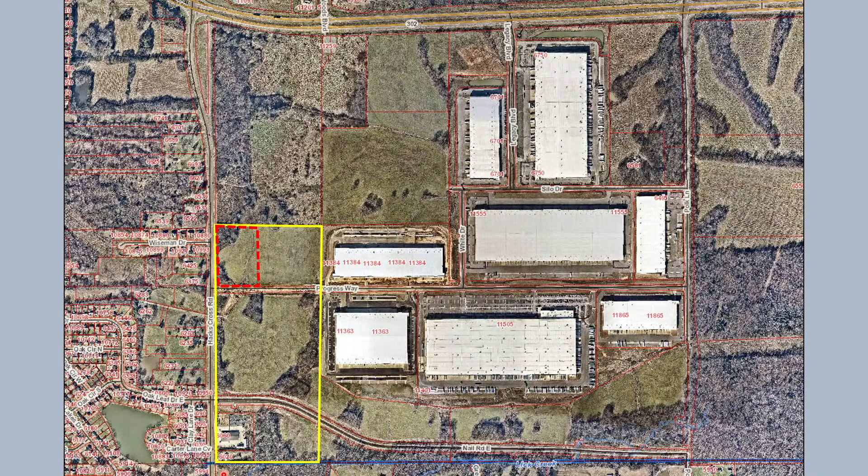So the preliminary development plan that was approved in 2009 had a vision of these having large shops and offices everywhere, which is just not realistic. Over time, a lot has changed in this area that has really made that plan unrealistic.

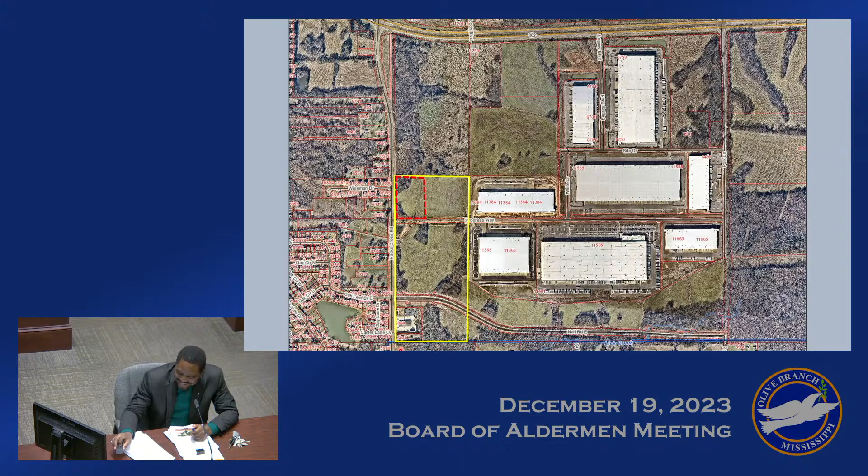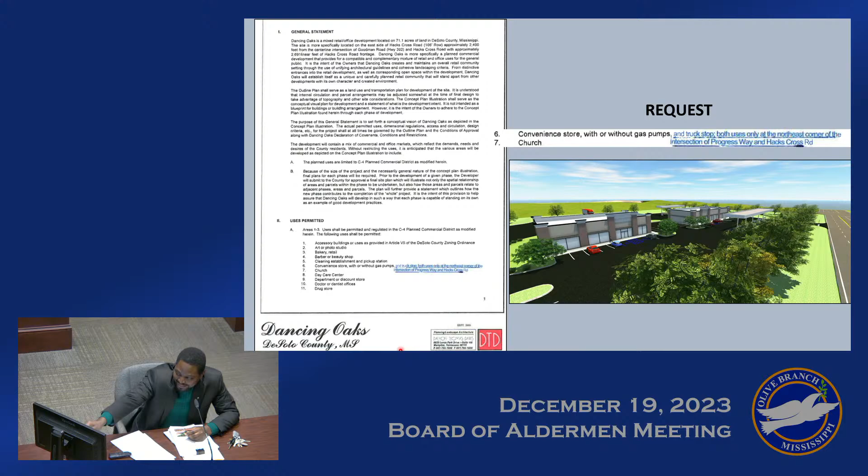The application, therefore, seeks to make that area designated in red into a C-store, really already the permitted use, with truck parking at the back, as shown on the site plan you have at the bottom of your screen to the right. So that basically would be the layout.

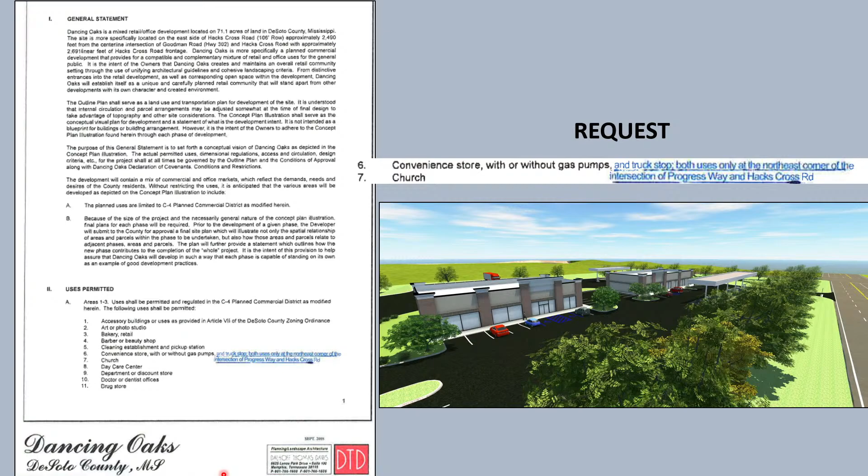When this was first considered by the Planning Commission at their meeting in November, it only had one building. You did not have this second building in front of where you have the truck parking at the back. But the neighborhood was concerned about the possibility of sitting on Wiseman Drive and being able to see those trucks - they didn't want that. So the applicant decided to add another building there that would serve as a buffer between Hacks Cross Road and the truck parking area at the back. That is why you had that second building added.

As I did indicate, in 2008-2009, when this project text was approved, this was essentially an agricultural area to the east, as you see on the map before you. So in 2009, that is the area map - it was essentially green, all agriculture. Since then, there has been significant industrial development to the east that has changed the character of this area and will make this amendment provide an opportunity for truck parking and necessities - a public need, one would say.

There are currently, including the square footage of industrial warehouses that have been approved in this legacy park, over 6 million square feet of industrial warehouses. That is a lot of trucking activity that takes place there. And so being able to provide commercial services that can service those trucks is a public need.

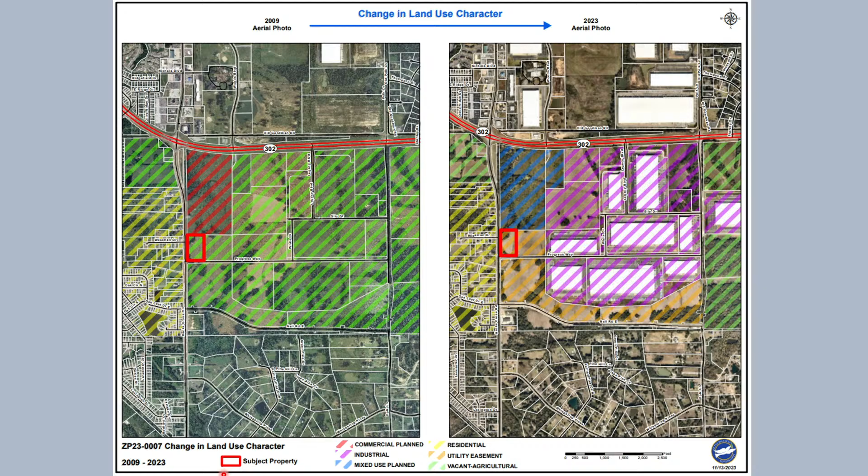Just as we have over here with the QuikTrip. QuikTrip is really helping to take away truck traffic all across the city. We're able to have folks just go in there, fuel, park, and then leave the city.

So this kind of analysis - the zoning ordinance has a number of provisions on how we review any changes that are requested in the C4 zoning district. Consistency with the minimum development standards of the C4 - all the conditions or the development standards for the Dancing Oaks PD will remain in place. None of them is requested to be changed. So in terms of buffer, parking requirement, everything that you had required in the project text for the C4, that is being maintained in this project text, in this amendment. The second is for the board to find that the request has been made by the property owner.

Yes, it's been made by the property owner. The third has to do with traffic conditions.

This is actually estimated that it will reduce traffic, especially truck traffic driving across the city. From the industrial park right down to Flying J is about 2.23 miles, that's where trucks currently go to now. Those that go to QuikTrip is 5.09 miles, and the very next truck stop area where you have any kind of truck parking is in Blue Bird, which is 7.39 miles. So if you aggregate that, that's over 15 miles of truck traffic on public streets that will be reduced by having this at this particular corner.

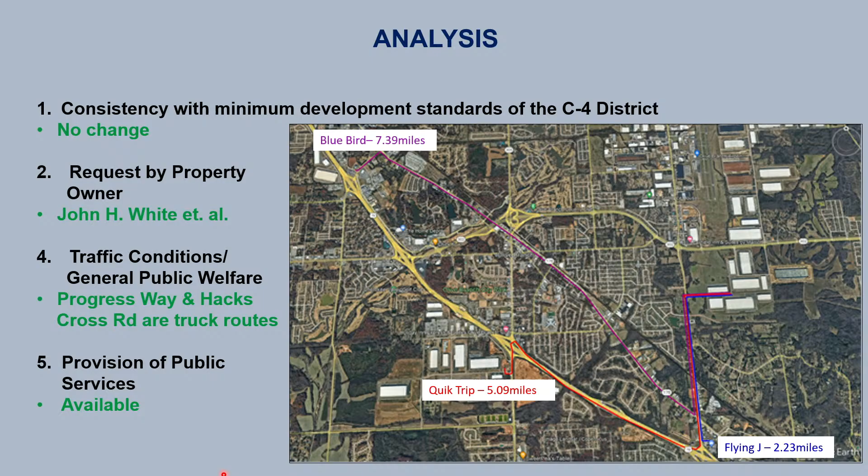When the board last year amended the zoning ordinance, you had two requirements for any area that has to do with a truck stop: one, it has to be within half a mile of a truck route, and the property must be a minimum of 2 acres in size. So this is 7 acres, and it is on Hacks Cross Road and Progress Way. Those are all truck routes, well within that half mile requirement. So it meets those two specifications.

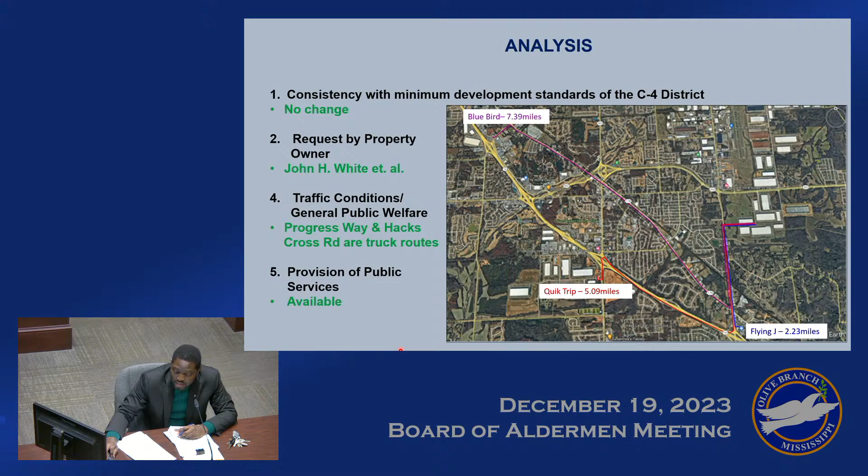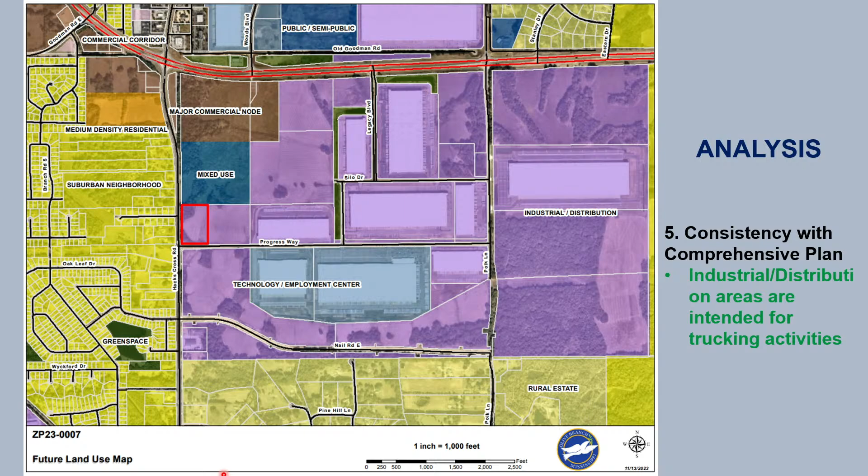Public utilities are available around this property, and it will be the responsibility of the developer to extend them to serve any development on the site. The future land use map designates the site for industrial distribution. Those are areas that generally lend themselves to trucking activities. As such, the requested amendment aligns with the future land use map.

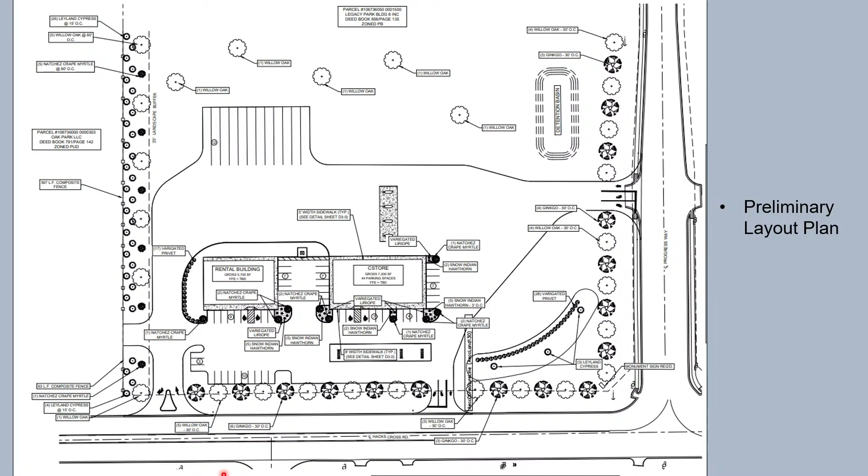This is the preliminary development plan. It incorporates all the features that are currently required in the Dancing Oaks PD. All of them are included in this development site plan.

The Planning Commission at its meeting on December 12th reviewed this and unanimously recommended approval subject to finding that the character of the area has changed. The comprehensive plan designates the property for industrial distribution activities, which include trucking support services, and the proposed development has the potential to reduce truck traffic congestion on public streets. All other criteria having been met, the Planning Commission recommended approval subject to conditions 1 to 5. That concludes staff's presentation. Thank you.

Thank you, Assam. Does the board have any questions of Assam regarding the staff report? Mr. Wallace? The structure that's below, if you look at the bottom of the drawing, the structure here, is this going to be a part of it, or is it going to be taken down, or do you know what the proposal is? There seems to be a structure at the bottom.

No, sir, I think that is an area map that was included in the project text when the project text was adopted back in 2008. So it doesn't exist now? So it doesn't exist today. I think that is directly below John Deere. Okay, that's directly south of John Deere. It doesn't exist today. This will not extend down to that area.

And this development's already approved. It's basically adding a building and allowing trucking, correct? Really, fundamentally, that's what it is. And those approvals, the majority of those came from the county back in 2007 or 8, is that correct? 2008, October 10, 2008.

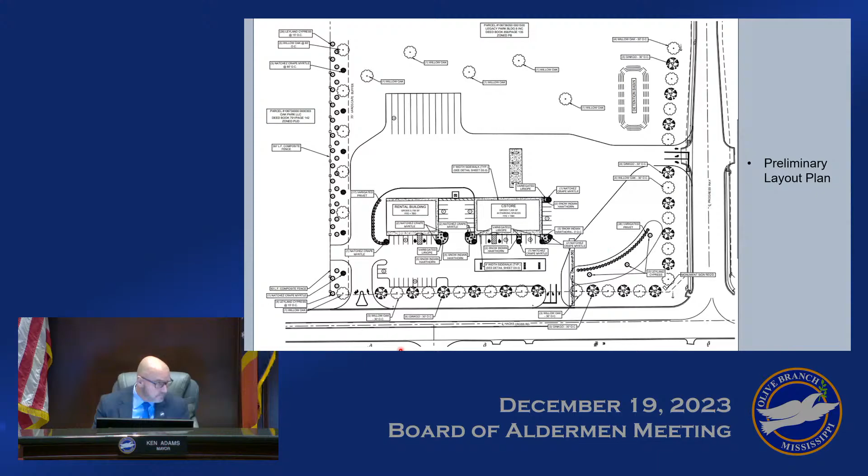One other question: if there's 12 trucks there and somebody pulls up and needs to stop, can they pull out on Progress Way and park on the side of the road? No, that would be prohibited. You cannot park on a public street, you cannot park on Progress Way. And I think that was part of the reason the Planning Commission also asked the applicant to increase the stacking lane behind the building from where you have the filling station down to Progress Way. Initially, it was 106 feet; they increased it to about 204 feet, to give more room for trucks to stand on the property instead of being on Progress Way.

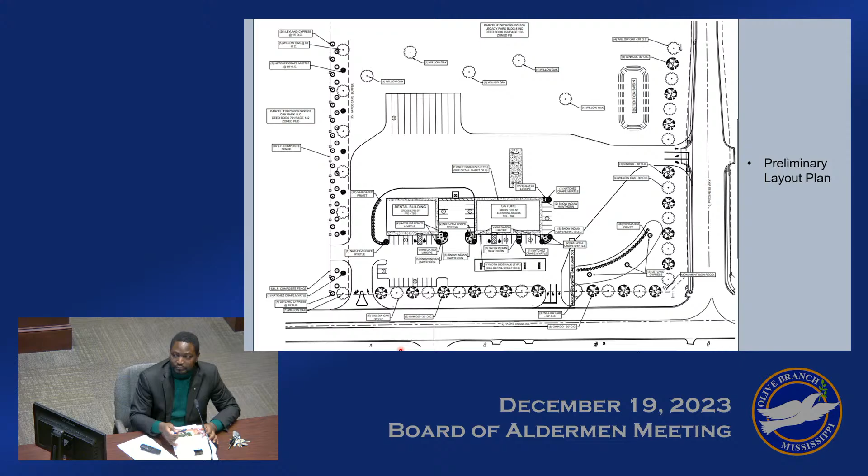So I have a question for clarification. If I heard you right, in 2008 when the county approved this, it allows for multiple C-stores by right there. However, we approved something within this past year limiting locations like this to no more than 2, and they have to be on a hard corner or a major intersection of a highway or major road. Is that correct? Yes, sir, with a caveat.

For this particular piece of property, Progress Way and Hacks is a hard corner. There's a traffic light at that intersection. So that'll be the differentiator, no more than 2 per hard corner and at a signalized intersection. There has to be a traffic signal there. Yes, sir. But for C4 property, that's a caveat, they are not required to be at a hard corner. That is left to the discretion of the board.

Don't they bring their property rights with them when they came into the city? Even though we changed the ordinance, their rules didn't change as far as the property rights they already had obtained, correct? Yes, sir, because it's C4, or another planned district, but in this case, C4.

One side note, Mr. Dickerson, I know you asked about the truck parking, so the board will know, because of the off-ramps on 78 we're getting tractor trailers there all night long. The police chief Cox and I have made a formal request of MDOT to make those no-parking ramps, and they're working to do that. I spoke with them last week, and we're going to try to get the trucks off those ramps. I know they've got to go somewhere, but too much parking on the street is too dangerous, people getting on and off the ramps. Sorry to defer there.

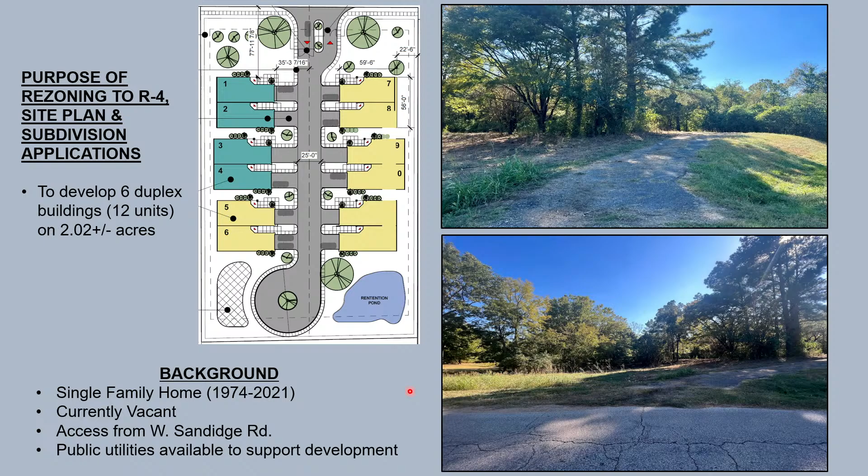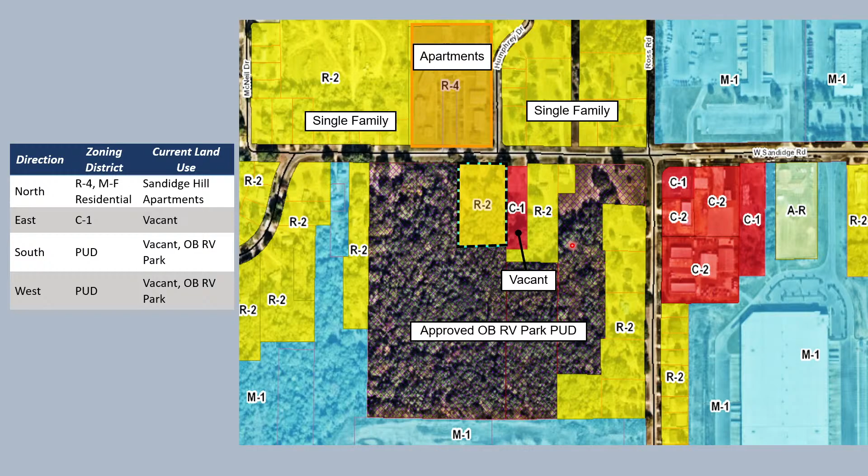As far as surrounding zoning, here's our subject property shown as R2. To the north we have R4 property, multifamily residential, the site of the Sandidge Hill Apartments. To the east of the subject property, there's a vacant piece of land designated C1, neighborhood commercial. To the south and west of the property is the project you approved in a PD about this time last year for the Olive Branch RV Park, which wraps around the property boundary on both sides. This shows a depiction of the subject property in the red square, and the master plan you approved last year for the Olive Branch RV Park that surrounds the property.

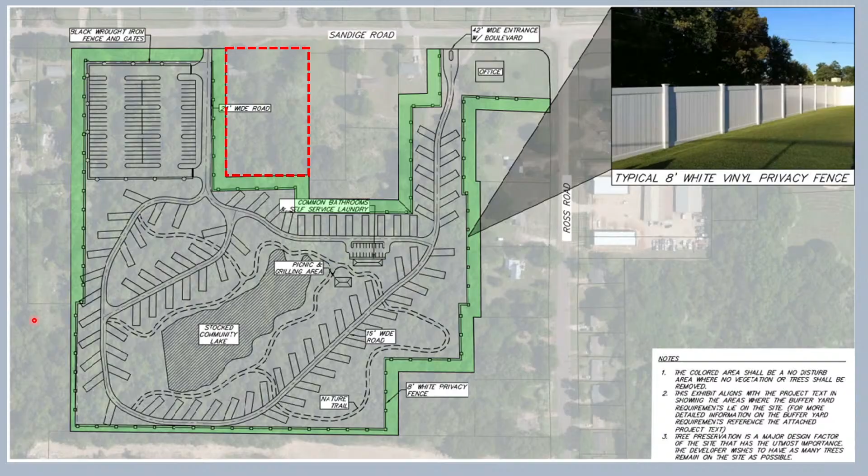As far as our analysis goes, there's no claim that the original zoning classification for the property was a mistake. As for the character of the neighborhood, the applicant has made a point that the neighborhood has changed significantly since the single-family home was built there in the 1970s. You can see what we have going on around the property—I mentioned the RV park immediately near the property, and this property owner also owns a piece of R2 located just to the east of the subject property.

Mentioned earlier the apartments in the R4 district, and we have quite a bit of single family around the property along Ross Road to the north and south, and more single family as you move farther to the west. The biggest change over the years is the amount of development in the M1 light industrial zoning district.

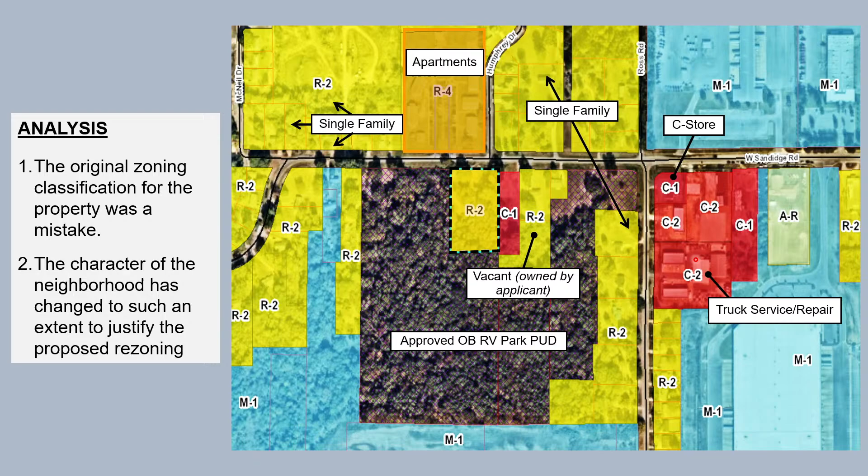More recently, we've had a C-store, a building reconverted into a convenience store at the southeast corner of West Sandidge and Ross, and some improvements for a truck service repair business located a little bit to the south of that.

Our comprehensive plan, adopted last year about this time, talked about the need to diversify the housing stock of the city. Citing a policy, new residential growth will be primarily comprised of single-family homes, but the future land use plan recognizes the need for diversification of the city's housing stock.

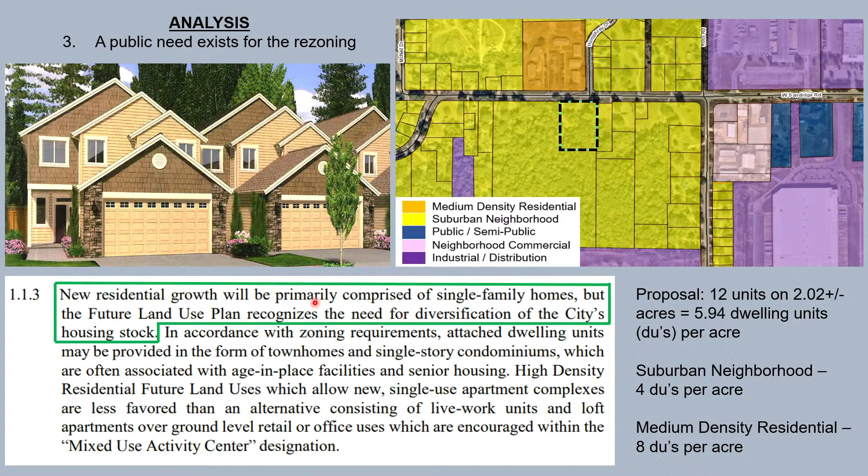We have a proposal for basically 12 dwelling units on a little over 2 acres, which comes out to just under 6 units per acre. So we're not significantly higher than the suburban neighborhood designation, and we're lower than medium density residential. We're meeting this policy of trying to diversify our single-family housing stock, and the duplex product is one we don't have much of in our city.

If you take a look out from our subject property, this shows you the future land use map. Here's our subject property, and one of the items I was discussing with Alderwoman Hamilton earlier today is what's going to happen as you go farther west on Ross Road.

The future land use map shows that area designated for single-family or suburban residential located to the west, and at the corner we have the Thunderbrook planned unit development, which is designated for a mixed-use center. So this is the plan.

Our subject property would be off of this picture, and as you come down Sandidge Road, it currently ends right here, but you can see the plan approved a couple years ago for the Thunderbrook property. That's all a single-family designated area.

You'd have Sandidge Road cutting through this way and back down here, and we've approved this area for mixed-use buildings, which would be lower-level retail and possibly apartment units on top. That was a picture shown in the Thunderbrook plan.

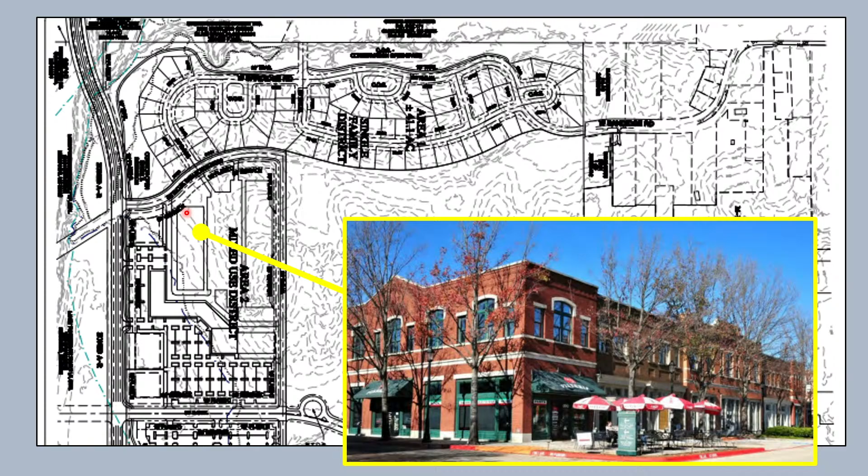So you can see how, as we go into the future, the area of the subject property is transitioning into maybe a higher density residential category. And as we get all the way to the corner of Craft Road, we could have a mixed-use development with somewhat higher densities as well.

As far as the site plan, it's depicted here, and this deals with several factors: do we have adequate open space and drainage facilities, how does our proposed land use fit in, do we have adequate community facilities, and are we complying with the comprehensive plan, which I just discussed?

You can see we have a proposed detention pond here, and substantial open space along Sandidge Road. This proposal is for a private road, to be gated out here — you can see some gates off of Sandidge Road.

You can see the units, and all of them would have two-car garages, with some area for stacking of vehicles in the driveways as well. Again, this would all be behind a gate, so this would be a private driveway and not a public road.

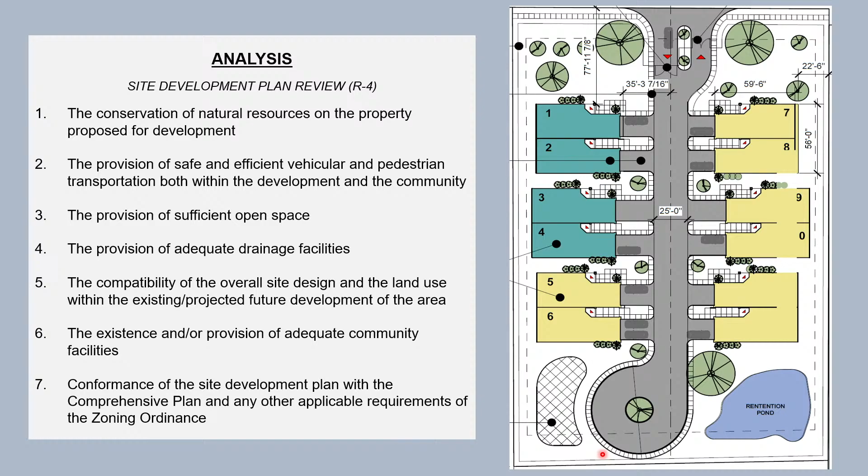The Planning Commission reviewed this item at their December 12th meeting and, by a unanimous 5-0 margin, passed a motion approving the requested rezoning and the associated site development plan, subject to 6 conditions. Number 3 deals with a 6-foot high composite fence required around the perimeter of the site.

This is just a preliminary plan that you can see depicted, so they would have to follow through with staff and submit full site, civil, and landscape plans, et cetera, for staff review and approval.

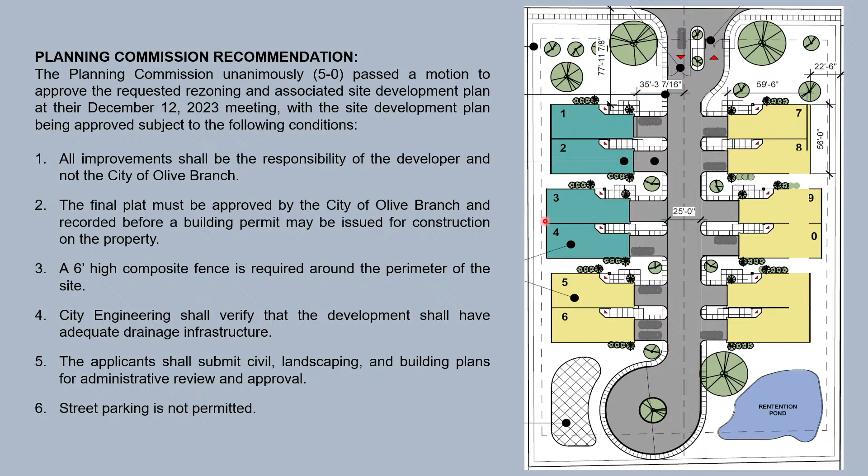Thank you, Mr. Gambone. Any questions of Mr. Gambone regarding the staff report? I do have some questions. I'll start with Mr. Gambone.

Okay, these will be rentals, correct? Well, we have a later agenda item that proposes them all on a single lot, so unless the developer is planning to do a condominium-style development, in all likelihood, they would be rentals.

Do we know what sizes these would be? I believe Ms. Song had talked to the applicant, Ms. Bogan. I believe she's out there, and she may want to answer that question for you.

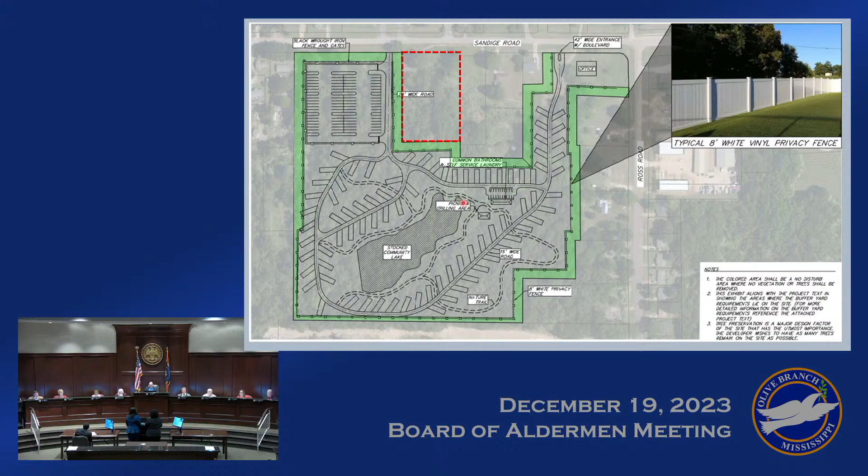If it's okay, we'd like to ask our project consultant, who also did our design on the fencing, to come up. You mind coming up, Mr. Joseph Eccles?

Will y'all own all the houses, or are you going to personally own all the houses, or sell them? Well, right now we have that as an option to sell. So you'll have a homeowners association? Yeah, it would be a separate homeowners association if we decide to sell them.

Come forward, sir, name and address, and you can address the board. Hello, my name is Joseph Eccles, and I'll be working on the architectural and development management of this project. I'm happy to be a part of this project with them. I'm really happy to see that it's been approved once, and I'm hoping we get approved again tonight. I can answer any questions if anyone wants to ask.

I think there are two points: Ms. Hamilton brought up one with the composite fence, and Mr. Gambone, would it be more appropriate that if this is approved, they work with staff on how to tie that fencing in with the RV park? Yes, sir. And the other thing that I think would help the development, I like the concept, but I'd like to see maybe a minimum of 50% brick or stone.

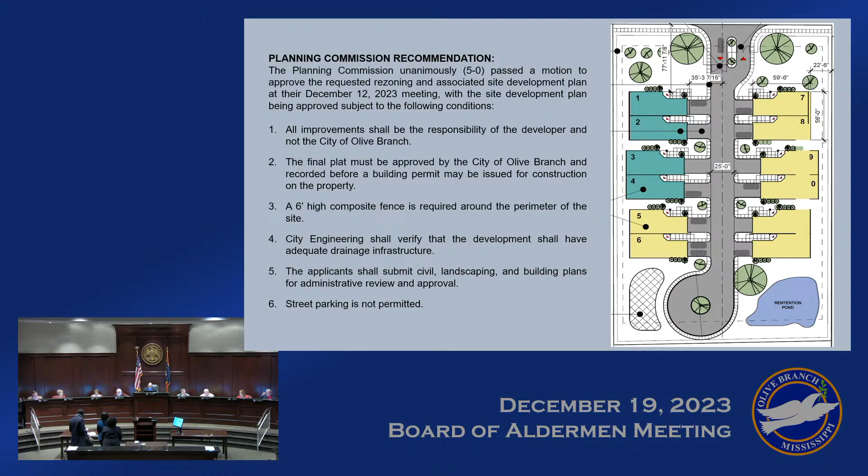Any additional questions, board? Any motions to move this from R2, single-family residential district, to R4, multifamily residential district? Is there a motion to do that?

I make a motion to approve it as applied. Mr. Collins, motion to approve. Is there a second? Mr. Wallace, second. Any discussion? All in favor? Aye. All opposed? Motion carries 7-0. Thank you.

Next items, Planning Commission new business. Number 1, subsets A through E. These are consent agenda items with minor changes. Does the board need any additional information on this? It's either setting a public hearing date, which is just an administrative matter, or final plat approval. Any questions on items A through E, or any approval to move forward with these as set?

Mr. Wallace, motion to approve the consent agenda, the public hearing items. Does that include items D and E for the final plat and the revision? D and E on the second page are part of it. Was it your motion to approve the planning commission consent items? Okay, very good, I thought I heard public hearing date. Motion is on the table to approve these consent agenda items, A through E.

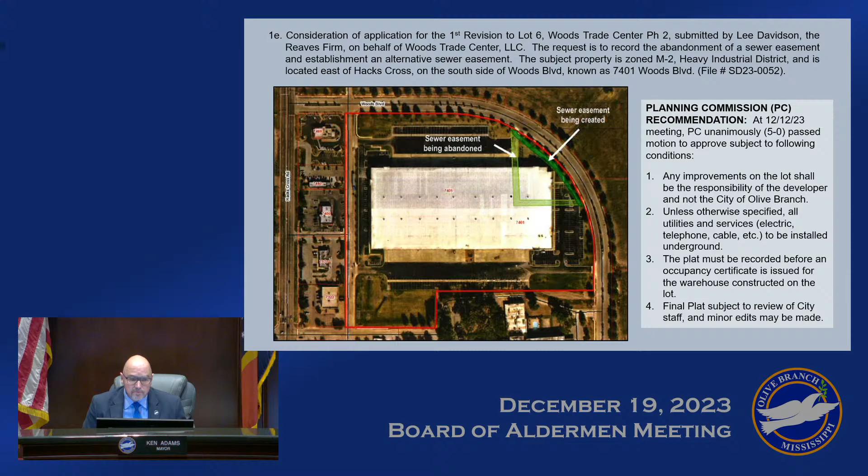Planning Commission, new business continued, item number 2, consideration of application for a final plat for Bogan 1-lot subdivision.

Jim, Mr. Shumpert, before you leave, I'd like for the board to acknowledge we had a guest tonight. I almost let him slip away, but Jim Shumpert served on the Planning Commission for over 10 years and has retired and gone on to other things. I thanked you at your meeting the other night, but I wanted the board to get a chance to thank you tonight for serving on the Planning Commission as well.

Thank you, Jim. Mayor, I would like to say that Mr. Shumpert's done an excellent job. He lives in Ward 2. I've watched it, and for 10 years he's been right there taking care of business, and I really do appreciate it. Thank you, Mr. Shumpert. Awesome, yes, thank you very much. We have some dedicated citizens that serve on these boards, without a doubt, and we're very, very appreciative of that.

Continuing, item 2, consideration of application for a final plat for Bogan 1-lot subdivision submitted by Patricia Bogan Taylor and Ruby Bogan Harvey, property owners. The request is to create a 1-lot subdivision of 2.02 plus or minus acres. The subject property is currently zoned R2 single-family residential district, but has an open application to be rezoned to R4 multifamily residential district. The property is located at the southwest corner of West Sandidge and Humphrey Drive, known as 7841 West Sandidge Road. Is there a staff report?

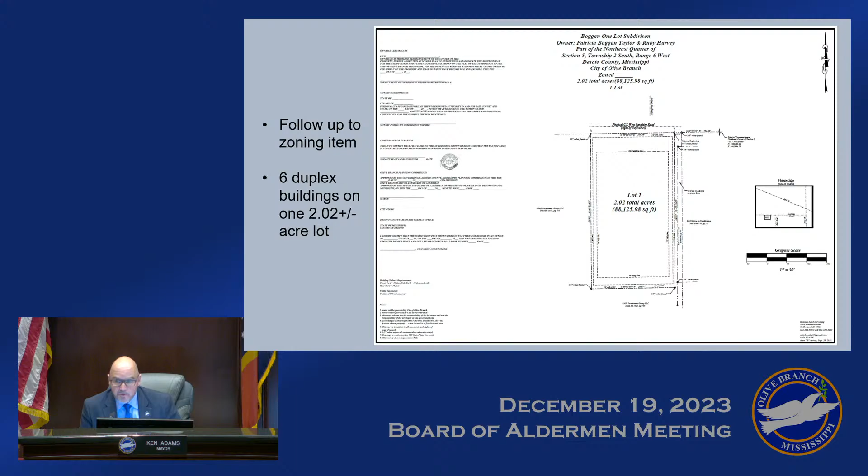Yes, sir, just a few brief comments. Again, this is the same subject property we just discussed under the rezoning, and the proposal is for a single lot, 2.02 acres, and the proposal is to put 6 duplex buildings on the single lot.

The map here should now be R4 since you did rezone the property, and we have zoning standards in the R4 district that form a formula showing how large a property needs to be for 12 dwelling units. You need a certain amount for the first unit, a certain size for the second and third units, and then 2,800 square feet for each additional unit. With 12 dwelling units proposed, the math requires the site to be at least 1.06 acres, and here we have a 2-acre site, about twice as large as required.

We have all of the setbacks properly noted on the plat, and these setbacks are being applied as if it's one lot. All along Sandidge Road is considered the frontage, not along their private driveway or street, so that's where you would measure your front yard setback.

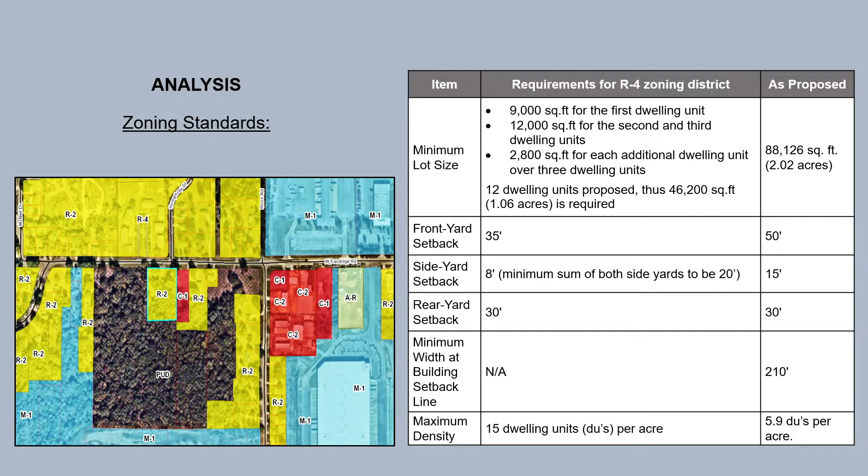We're in R4, where the maximum dwelling units per acre is 15, and they're proposing just under 6 dwelling units per acre, so they're compliant with the standards. Again, we have a private gated street.

One of the requirements associated with the subdivision plat is to do improvements along Sandidge Road, including a sidewalk. If you recall, last year when you approved the Olive Branch RV Park, there were also requirements to improve the frontage of Sandidge Road, so we'll be extending sidewalk all along that frontage. We do have utilities out there—water, sewer, and gas—available to the subject property as shown on this drawing.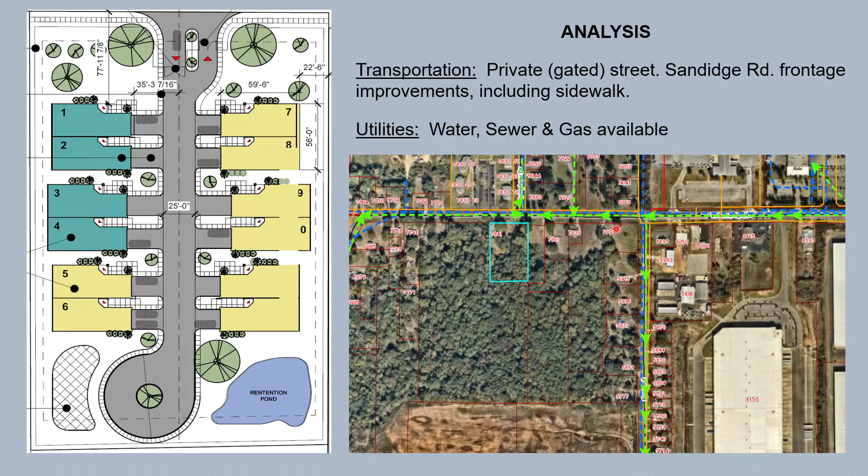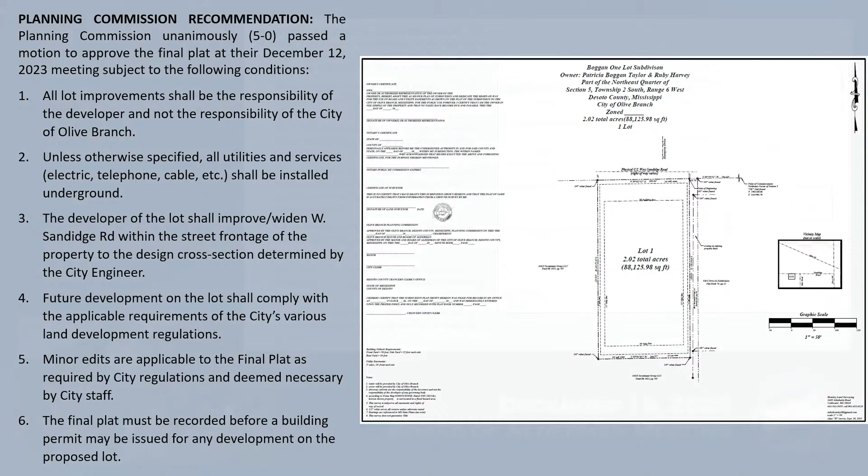Our Planning Commission did review this item at their meeting of December 12th, and by a unanimous 5-0 margin passed a motion to approve, subject to the 6 conditions as noted. That concludes the staff presentation.

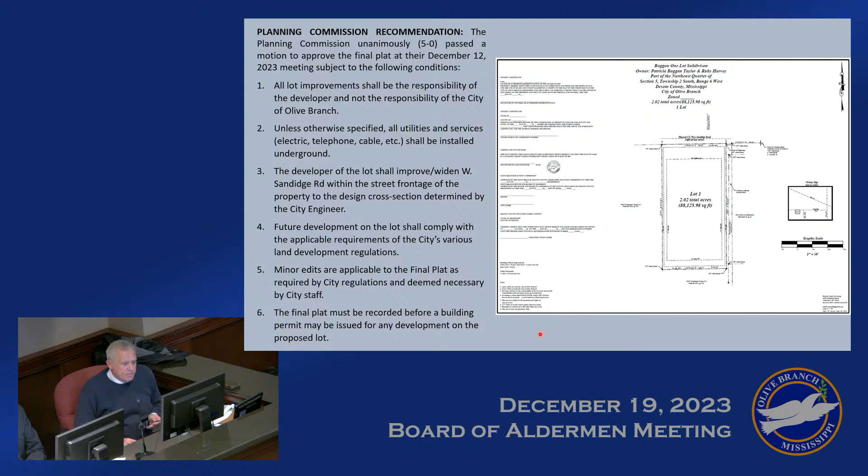Thank you, Mr. Gambone. Any questions of the board regarding the staff report? Any motions?

Mayor, I'll make a motion to approve as presented, but also with 3 additional items we discussed earlier: to accept the stated 1,904 square feet heated living space that the applicant stated as a minimum; construction material would be a minimum of 50% brick or stone, with the remaining balance being a non-wood or composite surface or material such as hardy board; and lastly, direct the developer to work with our staff in designing the continuity of the fencing with the adjacent RV park.

Thank you, Mr. Earhart. So I'm hearing 1,904 minimum square footage, 50% brick minimum, the remainder being non-wood like hardy board or composite wood, and for the developer to work with staff on fence design in conjunction with the Olive Branch RV Park. That's the motion. Is there a second? Second, Ms. Hamilton. Any discussion? All in favor? All opposed? Motion carries.

Mayor, just for clarification, in case anybody sees it in the minutes, conditions of that sort are appropriate for the site plan, which was approved with the rezoning. So for the subdivision item, that's just approving the subdivision plat, not necessarily addressing conditions as to whatever structures are built within that plat. If the applicant was okay with those conditions and the board approved it unanimously, we'll reflect the conditions Alderman Earhart added in the site plan approval, which was the prior item, rather than in the board's approval of the subdivision plat, because the subdivision plat just divides a lot.

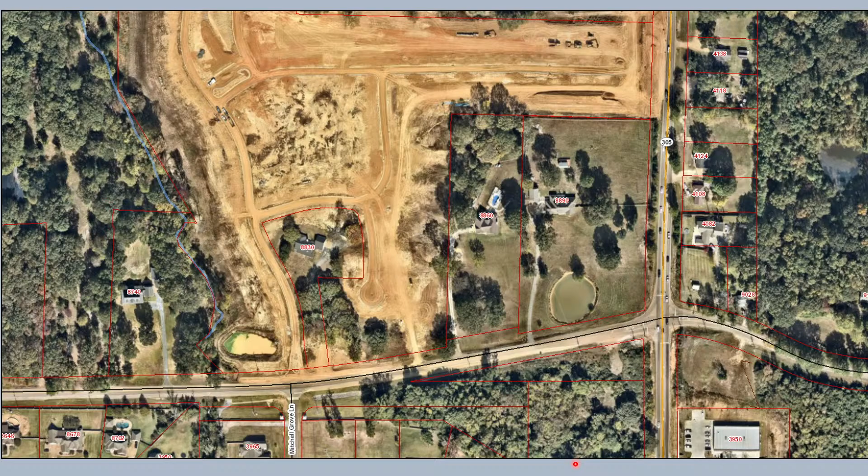It's probably easiest to show you this through pictures. This is Highway 305, College Road, and we're in this area right here. The Argos 3-lot subdivision is one that was approved a few years back. It was recorded on June 30th of 2021, and what's shown in the yellow outlines are lots 1, 2, and 3. They're all a little bit over 2 acres in size, totaling about 7 acres there.

And that's what's being requested to be vacated. So what's shown there on my drawing would no longer be there, but that's the way the property is currently subdivided. It's proposed to be replatted into a single lot with a slightly different configuration shown in the black outline. There's an existing home on this piece of property, and the proposed lot would be 2.17 acres in size.

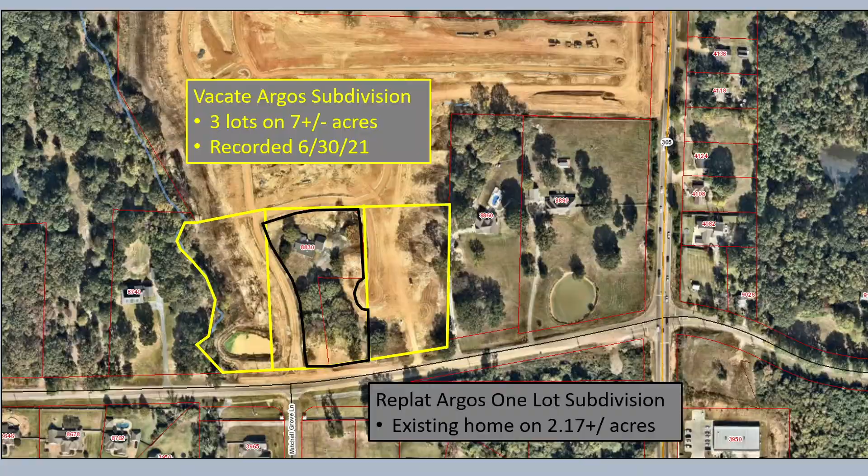This all kind of goes back to the Old River Farm development that was approved a couple of years ago. I've outlined those lots 1, 2, and 3 of the current Argos subdivision on the Old River Farm master plan. Mr. Matthews essentially purchased all of that property, including those platted lots, and then made a deal with the owner of one of those lots, or part of one of those lots, to basically reform it in this configuration.

This is just a blow-up of the southern area showing the proposed configuration. In the original Old River Farm plan, that was intended to be lot 73 of that development, but the owner of this property decided they would prefer not to be part of Old River Farm because they don't want to be restricted by the covenants and restrictions and homeowners association dues and all of that. So that's why this is coming back as a separate lot to basically redo the Argos subdivision.

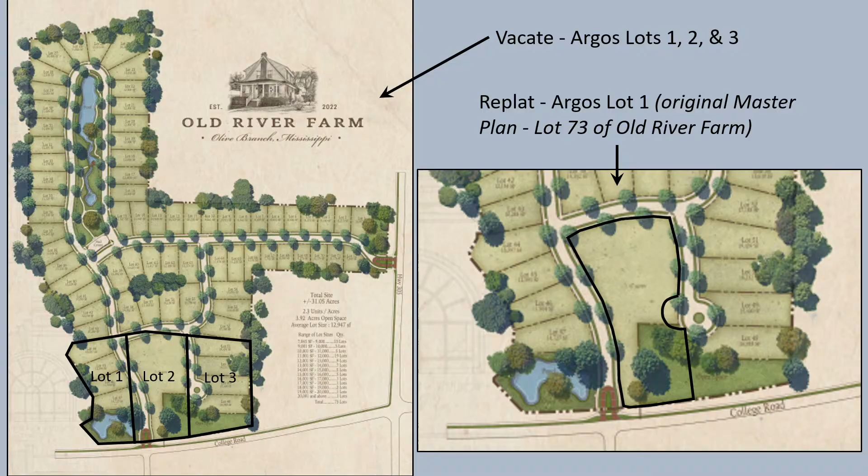This just shows you a copy of the final plat that was prepared by Civil Link. Our planning commission reviewed this item, or both items, at their meeting of December 12th, and by unanimous vote they did approve, or recommend approval of, the plat vacation for the 3 lots, and then replatting as 1 lot, subject to the 5 conditions as noted. That concludes the staff presentation.

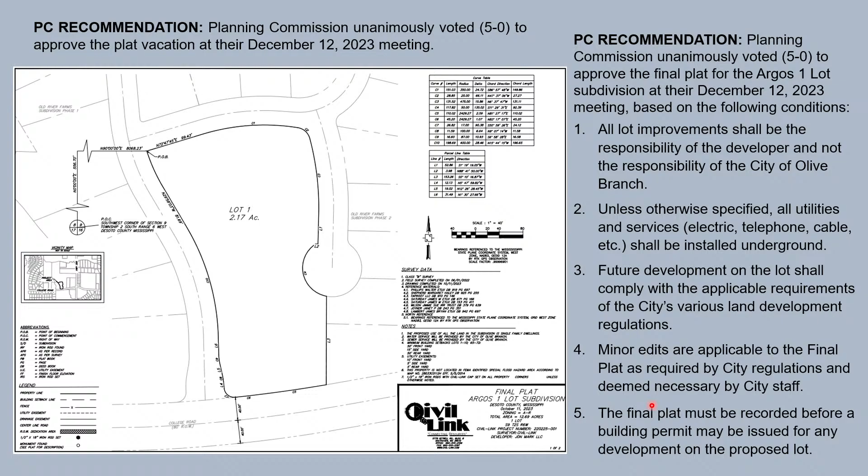Thank you, Mr. Gambone. Any questions of Mr. Gambone regarding the staff report? Does the applicant have anything else to add? Okay, thank you, Mr. Crooner. Any questions or motions from the board?

Mr. Wallace, motion to approve as is. Is there a second? Second. Ms. Hamilton, any discussion? All in favor? Aye. All opposed? Motion carries.

Mr. Mayor, did you want to make a separate motion, one for number 4, the vacation, and one for the new plat? Is there a motion or any questions on item number 4 now that item 3 is closed out?

Mr. Wallace, motion on item 4 to pass as is. Is that correct, Mr. Wallace? Is there a second? Second. Mr. Collins, all in favor? Aye. All opposed? Motion carries.

Next item, consideration of application for a civil site plan review for a C-store with gas pumps, submitted by Henry Stratton Associate of Colliers International, on behalf of property owner Fairway Land LLC. The request is to approve the site plan for a permitted C-store with gas pumps on a 1.34 plus or minus acre property on the northeast corner of Alexander Road and Highway 302. The property is zoned C4 Planned Commercial District and is known as 1019 Ridgeway Industrial Drive. Staff report.

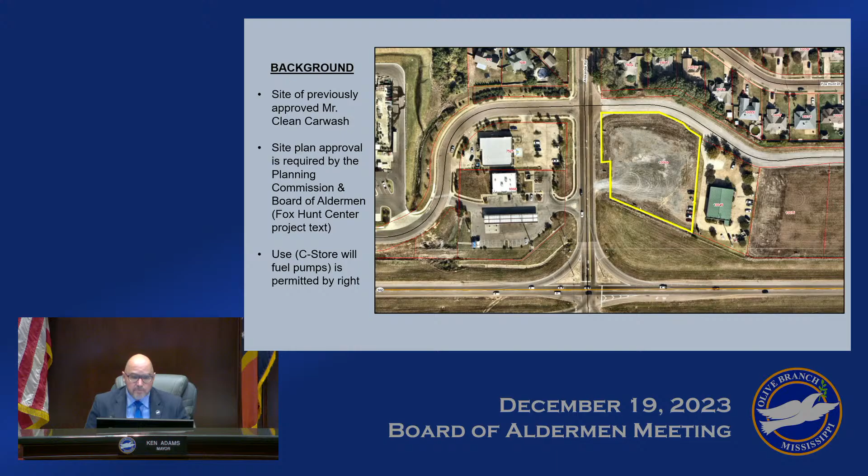Yes sir, just a few brief comments. The board may recall a couple of months ago, you all had approved this site for a Mr...

Clean Car Wash, and in this Fox Hunt PUD, this one's a little bit unique. It's atypical of most planned developments because in this case, it requires you to approve a site plan for any type of development in there. So you did previously approve this for Mr. Clean Car Wash. Apparently, they decided not to move forward with that project, so another developer has come in and is proposing the construction of a convenience store.

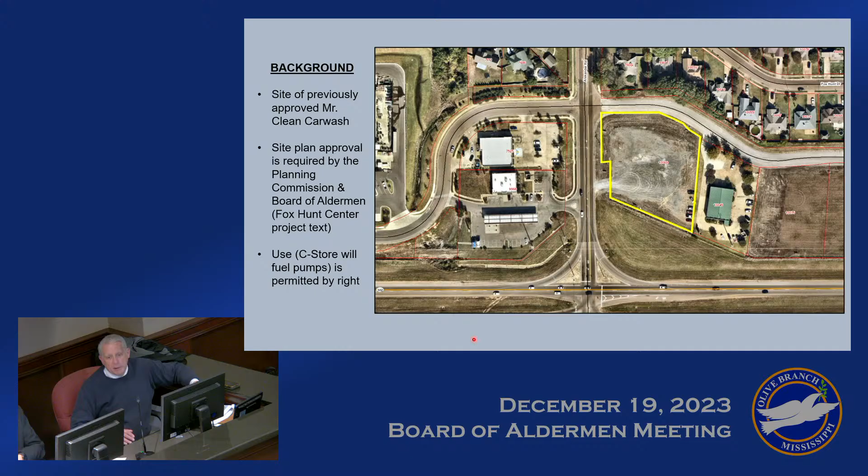So what you're being asked to do tonight is basically approve the site plan. One thing I wanted to note is in that project text, the C-store is something that is permissible by right, so it's not an issue as to whether or not that C-store can go forward. The C-store is already permitted by right, so this is just simply approving the site plan for the store.

And that's what's shown here. It's a rendered site plan. It does comply with the project text in terms of the setbacks. We have 2 project entrances off of Alexander. You have a right in, right out. We have a full entrance off of Ridgeway Industrial Drive on the north side.

We did check our number of parking spaces. The building is a little bit over 6,000 square feet in size, and that would meet the parking requirements with 31 spaces.

We did, in terms of the plans that were proposed - you're required to do 1 street tree for every 35 feet of frontage, and this property has a lot of frontage along Highway 302 and Alexander, as well as Ridgeway Industrial Drive, so there's a requirement to do 25 street trees. The plan that they submitted was a little bit short of that, so that's reflected in the conditions. You also have a required hedge to screen all of the parking spaces, which was included on the plans.

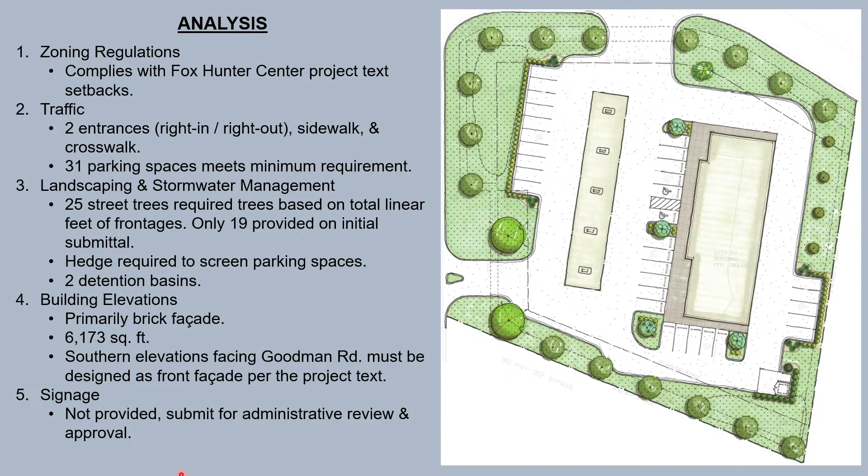As far as the building elevations, they do have a brick facade over top of some masonry units located at the bottom. Probably at 6,000 square feet, you should probably expect that there would probably be some retail bays in addition to the C-store, because it's a fairly large building.

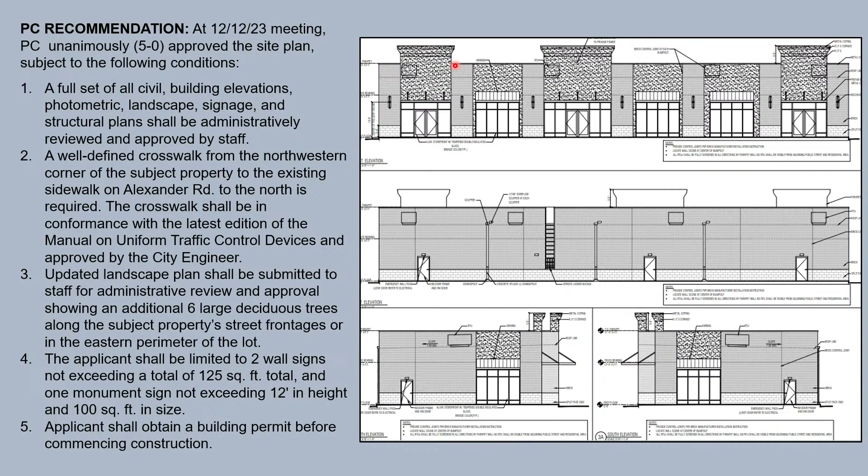This item was reviewed by our Planning Commission at their meeting of December 12th, and by a unanimous 5-0 margin, they did approve the site plan subject to the 5 conditions as noted. One of those is that they would provide a full set of civil site, landscape plans, completed building elevations, and a photometric plan to the staff for our full technical review and approval.

They are adding sidewalks along the perimeter of the property along both roads, and then we've asked them to do a crosswalk across Ridgeway Industrial Drive connecting the 2 sidewalks. Number 3 reflects the need for an updated landscape plan showing all of the trees that are required. And then we've given them an advisory comment - this didn't include any signage, so they'll have to meet the city's signage requirements, including a 12-foot height limit on the monument sign that they would be permitted to do. And of course, they would be required to obtain a building permit before commencing any type of construction.

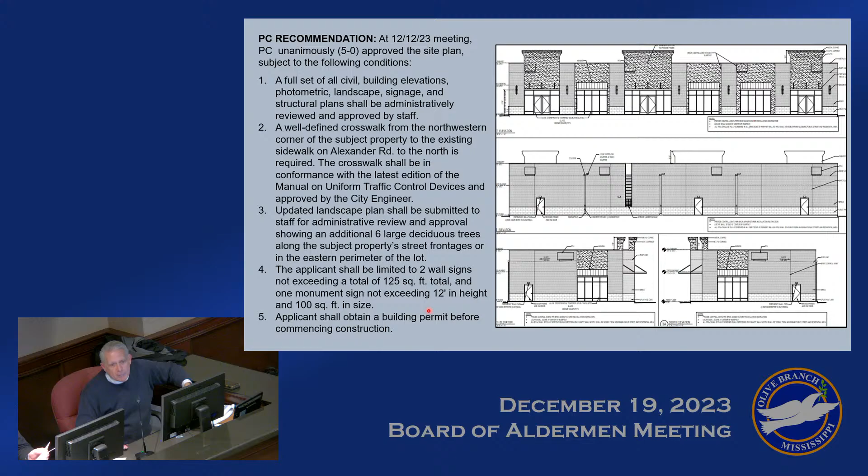So that concludes the staff presentation. I'd be happy to answer any questions. Thank you, Mr. Gambone. Board, any questions regarding the staff report?

Does the applicant have anything else to add? Is the applicant here for this application? Okay.

Board, any questions of the staff or any motions? Motion to approve as presented, Mr. Dickerson. Is there a second? Second, Mr. Collins. All in favor? Aye. All opposed? Motion carries.

Moving forward on the agenda to new business items, consideration of a facility use agreements with the Arc of Northwest Mississippi and the DeSoto County Dream Center with the donation of associated use fees. Mr. Dye, do you have that?

Yes, sir, I can take that. The board is familiar with these 2 organizations. Both of them qualify for donations from public entities. The board donates to these entities as part of its annual budget. And both of these organizations are holding a fundraiser jointly at the park in April of this next year, and have requested a donation of the use of space at the park.

2024. We had one map that showed what we completed last year. This year, we've kind of moved it over to show what we're trying to achieve, what type of treatment we're trying to do to each road. If you look on that graphic where it says Goodman Road East, it shows 2.57 miles. The State Line Road was 2.42 miles. It was almost identical in length that needed to be done, and it's in the 2025 also.

Okay, which is the next slide. Well, okay, you only had that one sheet? Okay, I thought we had all 4 of them. I've got it here in front of me though.

I just was curious, when we moved something up from 2025 to 2024, they were both almost identical in length, and estimated costs were about the same. Both of them on your slide showed a double micro. You were looking at the original report? The original report, yeah. Okay.

Well, it gets a little bit confusing because of the way our bids turned out, and we had to go back and change some things. And then there's been some adjustments to the types of treatment that we want to do to roads and so forth. I'd have to go back and look at that with you to see. But if there is a road that's moved further down, that was down on the list, we had come to some determination that this one needed it more, I guess.

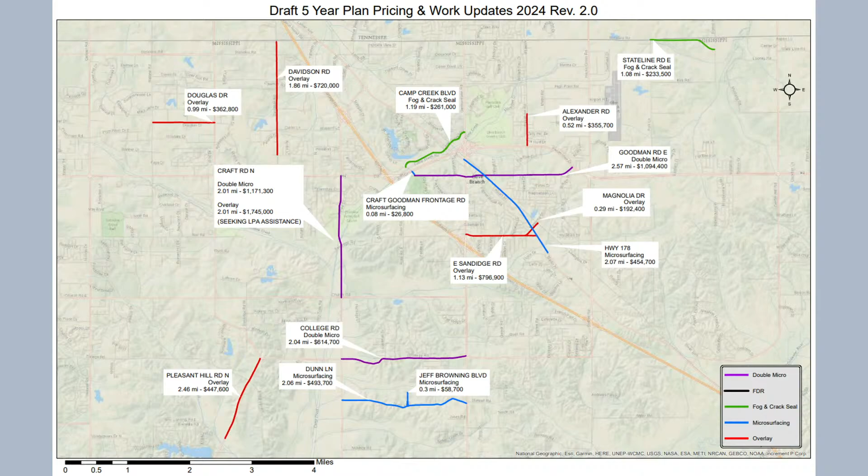Okay, well, that's my question, because they both looked identical on the original plan within just a 1/10 of a mile, and the estimated cost was almost the same. So I just was curious what thought process moved in the Old Goodman rather than the State Line. Yeah, I think both of them probably need some treatment and are probably along the same lines. So I think that we could look at any one of those roads that fell into that, and we can make some changes on it.

But now this is kind of the map that we were working from and trying to make the selections of which ones we wanted to do. We can't afford to do everything on there and stay within our budget. So we picked some. The ones that are in red are the ones that are up for consideration for overlay, and I've given you the list of which ones we selected from that. And then we went back and we looked at the remainder roads and tried to pick which ones we were going to do. So on this list, you see there's several that we did not select. So Craft Road is not on the list.

That was down for a double micro seal. That was going to be a fairly expensive road to do - we had both micro and overlay, and so I'm not quite sure about that road, but we kind of put that one off, trying to see if some other type of assistance might help with that road, because it would be very expensive to overlay or to do a double micro on.

So Jeff Browning Boulevard at the bottom, Dunn Lane, we did not put those on there. Pleasant Hill Road overlay was not one we were recommending. But any of these roads, I think, could be argued that they could be chosen if we want to stay with the plan and the way we've been approaching roads.

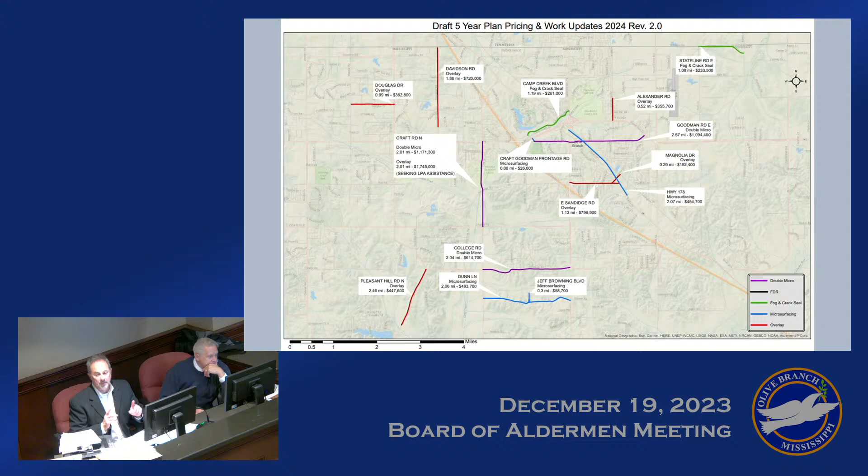Sections of it, and if it's really, really terrible, we just have to reprioritize, make a shift. I know Mr. Fessmeyer is not here right now, so I don't know the normal length that his team would go - I know they can't do a mile or half a mile, but they can do patch and repair. But if one gets in real bad shape, we just have to flip them, if it's that bad.

Do they have the ability to mill up a small portion of a street? Do they have that equipment? I don't think we have mill equipment, do we, Mr. Andra? Not for large portions, they can do small sections, mill and cut out - say 20 or 30 feet wide, they could mill something up that small.

Well, are you talking about taking up - so if you mill against the curb, I think Public Works purchased something so they can actually mill along the curb, and then dig out any bad spots. Well, what I was looking at - we've got a situation I talked to Cole about earlier in the year, where they've made multiple patches in the same area of the street.

Right, so it looks terrible and it's not smooth, and I was wondering if we could just take all of that up, mill it from curb to curb, about 20 feet wide, and just replace it all with one big patch. I didn't know if they had the equipment to do that. I would think that's possible - they did a lot of mill work on the new trail that went in, that's 10 feet wide, and that equipment, I'm sure.